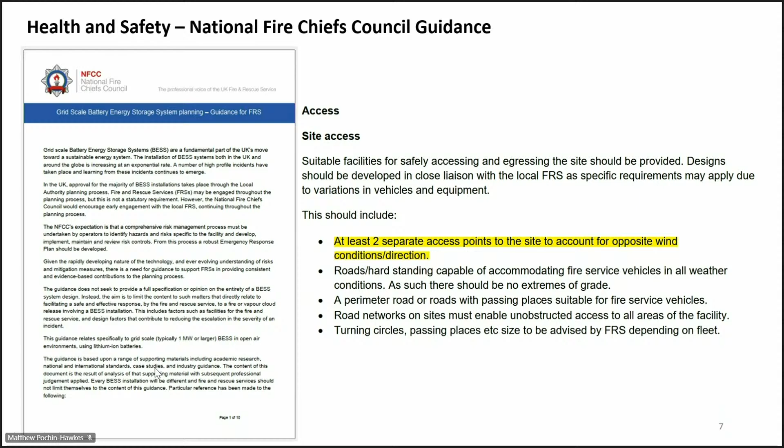Based on the applicant's plume study, which they've submitted since the committee, this branching point is considered to be a sufficient distance to ensure that the Fire and Rescue Service could have tactical firefighting options to approach the site from either direction, depending on the wind conditions.

These BES units have a number of safety measures to minimise the risk of that happening, but the risk of fire cannot be eliminated, and I'll come on to some of those measures. This has been modelled and produced by a principal scientific advisor for West Midlands Fire Service, stated to have hazardous materials special experience for 28 years, advising on chemical classification, monitoring and modelling dispersal.

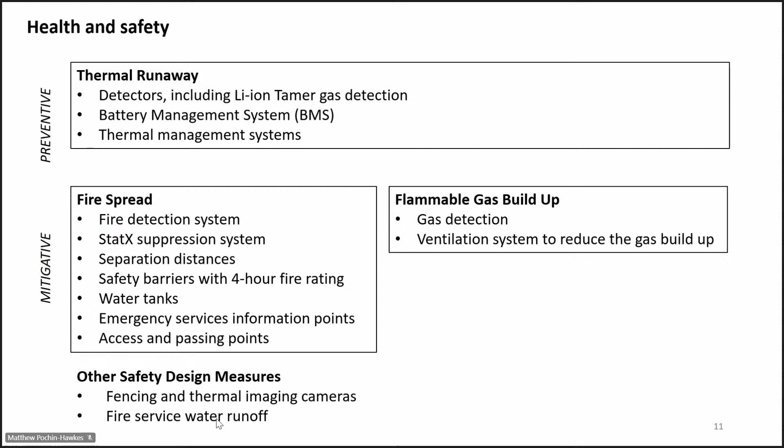That came into operation very early, and it used a different type of battery chemistry. Here is proposed LFP, lithium iron phosphate battery, versus a kind of nickel manganese cobalt, which has a lower thermal runaway temperature. These are just to kind of visualize that.

It's in America, so it's NFPA 855, whereas we've got NFCC guidance here, and that was a significant fire within a building of the first phase of the development.

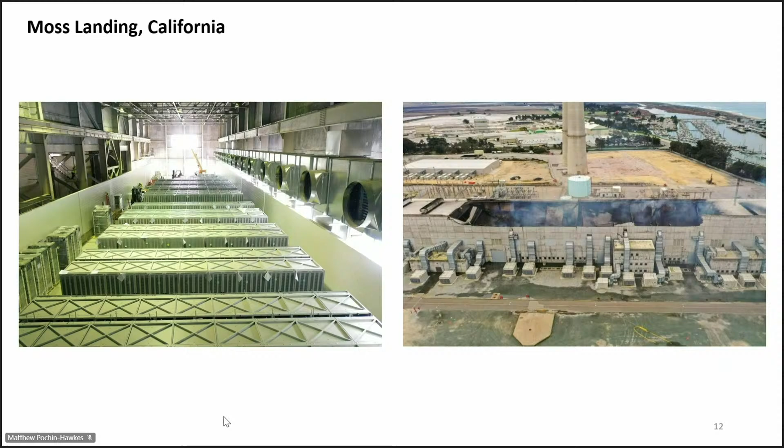And here, there was a fire during the construction of this development, and according to the reports from the Fire and Rescue Service, it was dealt with promptly and returned back to the construction team within 24 hours. And that kind of demonstrates a good emergency response in that situation.

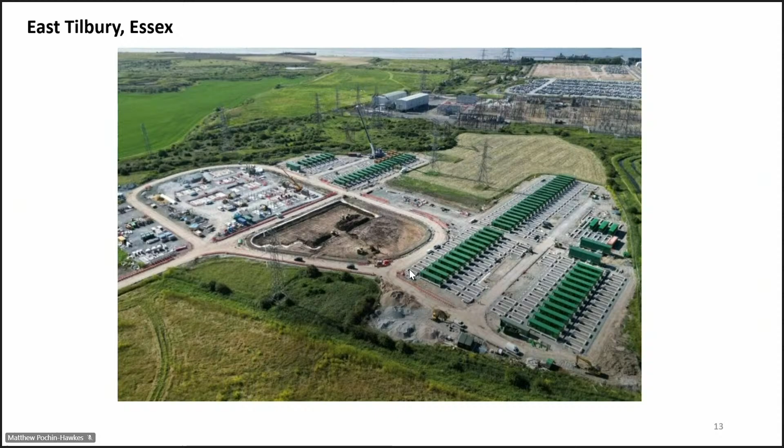So, in terms of the recommendation, we've looked carefully at the matters raised at the January committee and consider that the applicant has demonstrated the access arrangements to be suitable. The Fire and Rescue Service doesn't object. Whilst there have been extensive objections, it's also important not to lose sight of the benefits of this development, as well as captured in the January committee report. There are significant benefits of the proposal, which are considered to significantly outweigh the limited harm of the development.

So the recommendation here is to grant planning permission subject to conditions, and those conditions are outlined in the update sheet. I'm happy to take any questions on those conditions, but I'm just going to touch on the ones that have been adjusted.

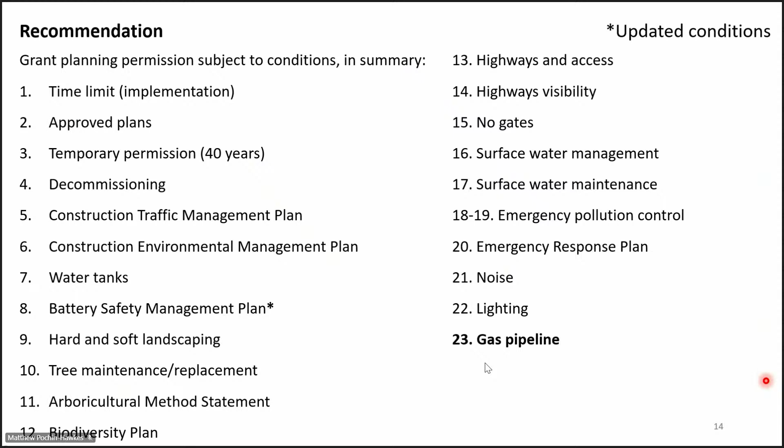That's condition number 8, the battery safety management plan. That's been updated to refer to the specific batteries, require the detailed battery safety management plan prior to commencement, not installation, so that just brings it forward a bit, and also be explicit about the CCTV provision being provided. Then the other update is the gas pipeline condition, and that's the condition wording that's been agreed with SGN prior to energisation of the development. There is also that informative that I mentioned on the police security measures for the site.

So thank you. That concludes my presentation, Chair.

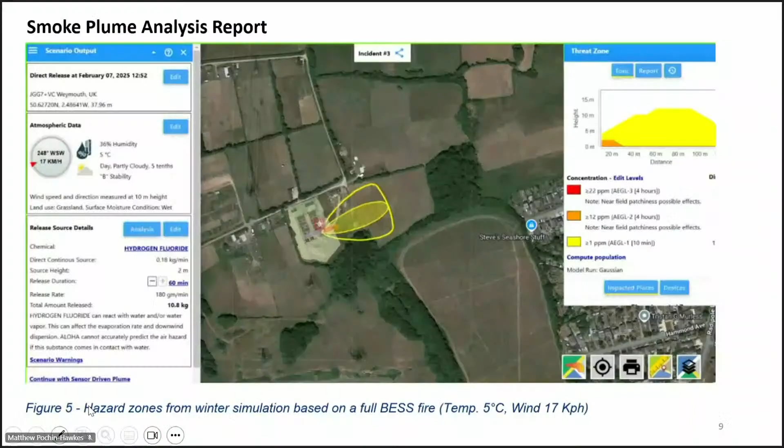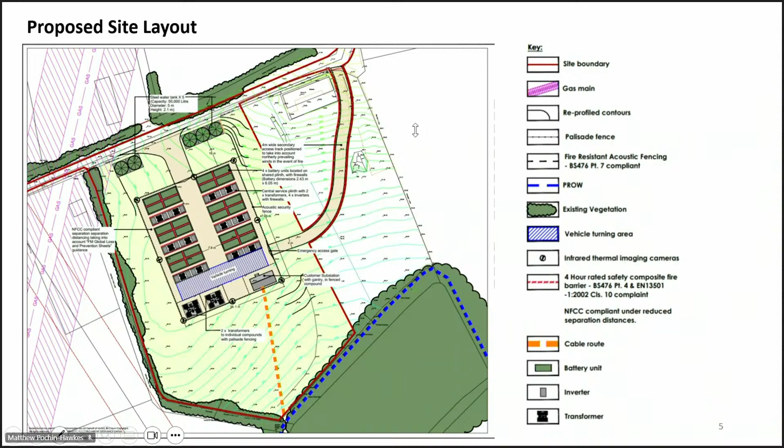Thank you. Councillor David Taylor, Charminster, St Mary's. Thank you, Chair. Yes, sorry, one question I did forget, which I want to come back in on, if that's okay. Charminster, St Mary, by the way, on that one there.

Your statement regarding the production of electricity for the benefit of the community. Now, I would like some clarification on this because I'm trying to find the paragraph in the wording there. I hope you can understand. It says where you're going to give a certain amount of energy to the community. You stated you were giving to 250 houses, was it? Something like that? Homes? Because the statement doesn't say that, it says it goes to the grid. And that's what I want to clarify, because it's got a differentiating statement there saying it's a benefit to the community, but it's actually going to the grid. So what is it actually giving to the community instead of just being a substation? Thank you.

So the energy that would go back to the grid isn't ring-fenced for the local community, it can go anywhere. I think the figures in the January report were purely for illustrative purposes, to picture how much energy this could produce in terms of serving local homes. So I've used ONS data for average energy usage in Dorset, which pulls out a figure of around 11,500 homes. But of course this substation sits in the centre of Dorset - we've also got Mannington, that's all we've got in Dorset at this level. So that electricity could go anywhere. In the committee report I'm talking about it in general planning benefit terms, a wider community benefit, and that tallies with the renewable energy net zero benefits as well, so it's an observational fact. Yes. Thank you very much. Thank you.

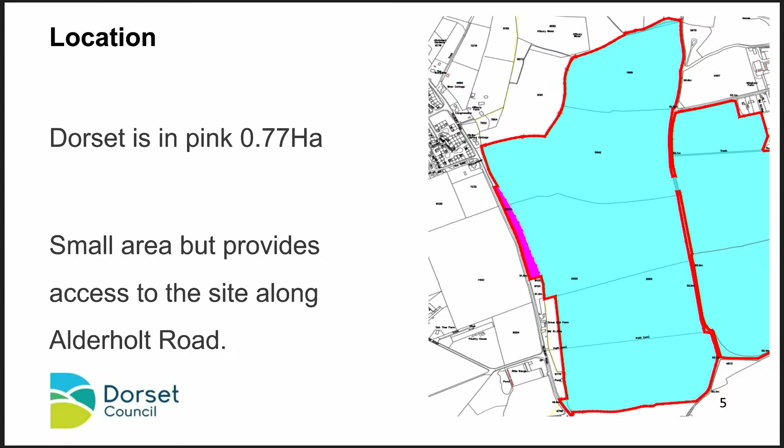So what does CEMEX want to do? Well, they want to extract 3.6 million tonnes of sand. The extraction will take around 13 years, with 5 years of restoration at the end. To facilitate that restoration, they want to bring in around 2.9 million tonnes of inert waste. They want to do this in a series of phases, which is the norm for these kinds of applications - you phase your extraction and phase your restoration, so you're not doing everything at one time. They'll do that in 3 different phases, which I'll show in more detail in a minute. As I said at the outset, there's also the usual supporting infrastructure like offices, haul roads, weighbridge, lagoons, and some in-site conveyor belts, which is the norm for applications like this, and I'll show that briefly in a bit.

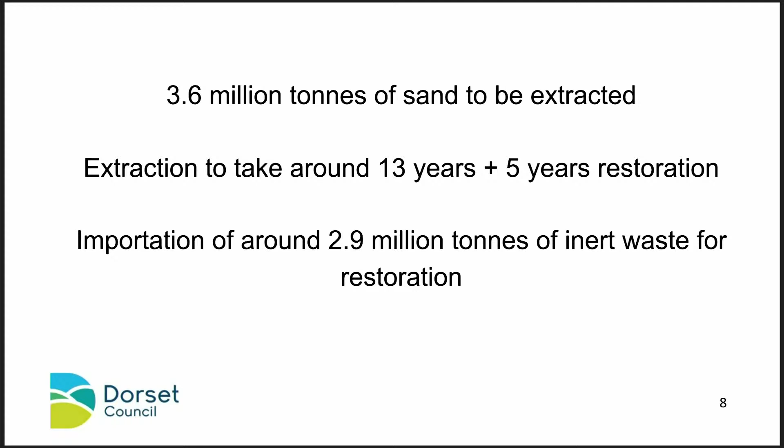So this is what the phasing is going to look like. The first phase, which will run for about 3 years, is extraction only. There will then be a period of extraction and importation, which will run for 10 years. The third phase will be about 5 years long, which will be importation only, bringing in the inert material with which to restore the site. So that gives you a feel for some of the stuff I'm going to talk about in a minute, because a lot of this drives HGV movements and the transport challenges and opportunities that are there.

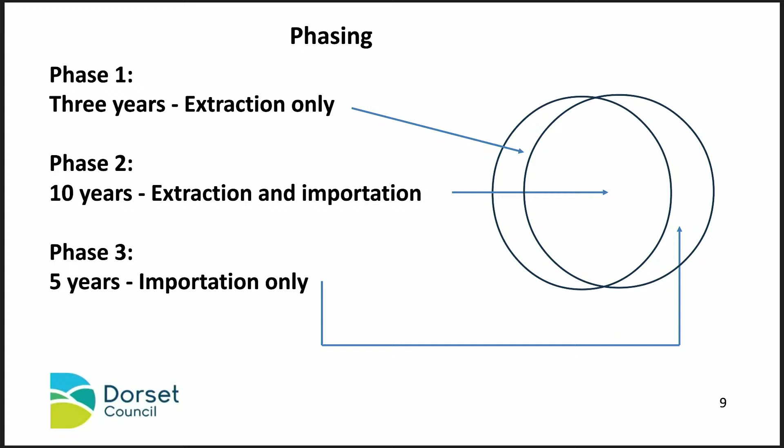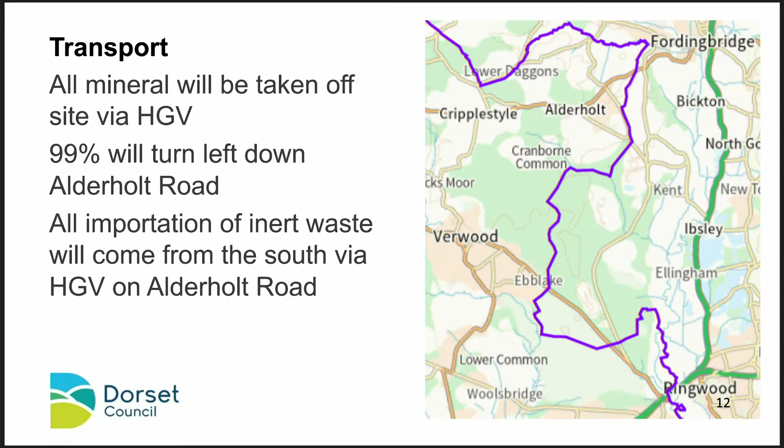Baker's Hanging is a national speed limit, and we've got some transport colleagues here who can talk about that. CEMEX have done a transport assessment in which they say they accept that some parts of the road offer challenges, but they say that HGVs can always pass what they describe as slowly. However, I will say they don't define what slowly means. And there are other parts of the road where HGVs can pass with no challenges at all.

So how are we looking at the minute? What's the current situation? We currently have around 2,500 vehicle movements per weekday along the road. The busiest hour is the morning rush hour between 8 and 9, where we have 220 vehicle movements.

And we currently have 80 HGV movements from Hamer Warren. We have other HGV movements as well, because the road is used by part of the road network, so other HGVs use it, but 80 of those are from Hamer Warren. There's hardly any HGV movement, if any at all, around the weekend from the quarry.

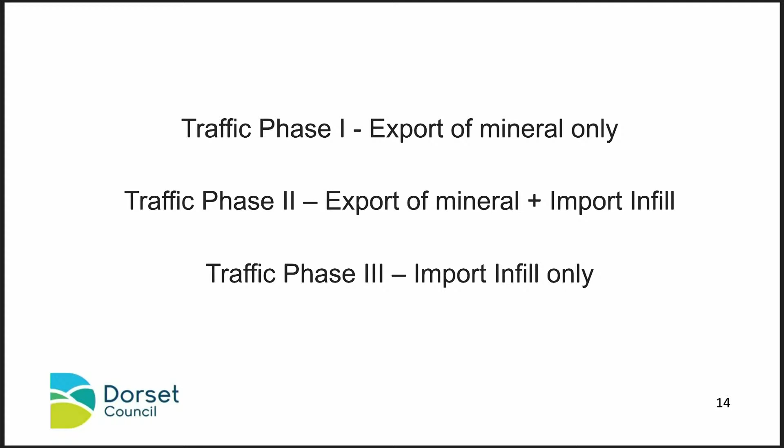So I said earlier about the phases when I showed that Venn diagram. So phase 1, mineral coming off-site only. Phase 2 will be mineral and import going both ways. And then phase 3 will be when we are bringing inert waste in for the restoration.

Let's have a look at some of the numbers associated with that. So during phase 1, it's quite likely that Hamer Warren, or Bleak Hill as it's sometimes called, will still be restoring, and they will be having around 36 HGV movements a day.

So I'll just say that again.

Hamer Warren phase 1: it's quite possible they will still be restoring, so they'll have around 36 movements a day. Midgham Farm, if permitted, will be extraction only, giving 90 movements a day, totaling around 126. As we move on, Bleak Hill stroke Hamer Warren will conclude.

There'll be no more restoration or extraction there, so we'll just be looking at Midgham Farm. We'll move into phase 2 of Midgham Farm, which is both restoration, bringing material in, and extraction, giving us around 132 HGV movements a day.

Then as we go to phase 3, which is simply the restoration and movement of infill into Midgham Farm, that gives us 90 HGV movements a day. So that's an indication of the volume of traffic moving along this road.

Of course, transport is more than just vehicular access. People move around in other ways. The footpath network is important in this part of the world. The vast majority of these are Hampshire footpaths, but they are used by our Dorset residents, so it's very relevant to our conversation here.

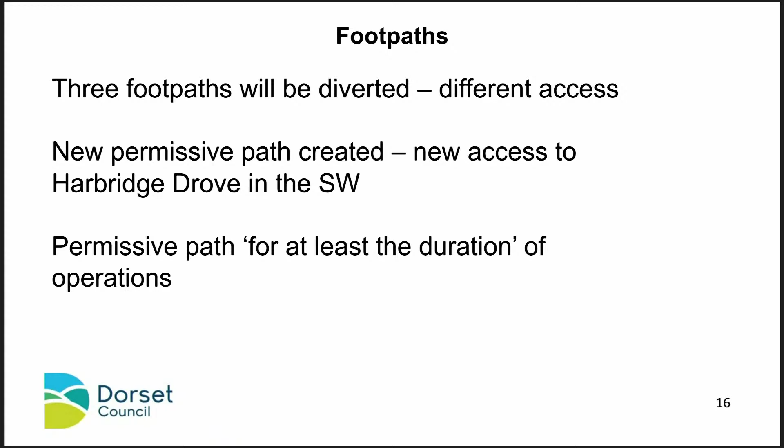The plan is to divert 3 footpaths, which I'll show you in a second, to facilitate the development, and then to create a new permissive path in the southwest. In the application CEMEX put together, they say that permissive path would be in place for at least the duration of the operations. So there may be a conversation about keeping it for the long term, there may not, but that's something we can perhaps look at.

So the plan for the footpaths would essentially be to move the current footpath network out and create a larger circumference around the site.

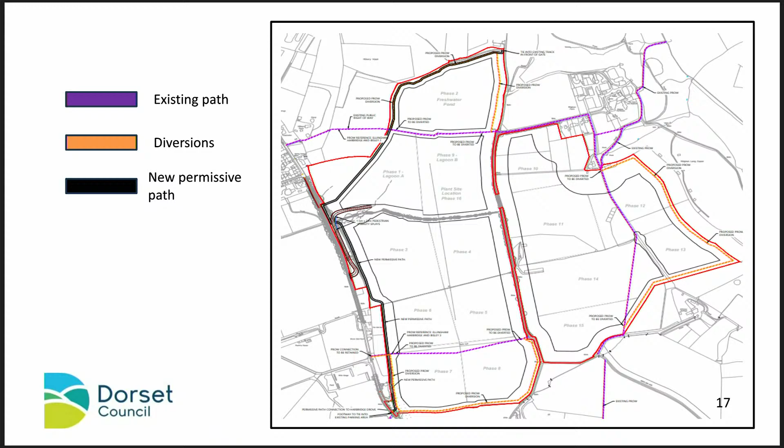Moving on away from transport, there are some environmental health concerns, such as noise and dust. Perhaps one of the most important is that the traffic needs to stay out of Alderholt, which we think we can ensure. And there are other concerns as well, around noise levels and dust.

We're confident we can have conditions with the applicant and Hampshire, as the decision maker, around the right conditions to ensure that happens if they get the right baseline. So it's a conversation to be had.

So we know where we are, we know what CEMEX want to do, and I've looked at some of the potential impacts as they hit our Dorset residents. So what I'd like to do now is move on and look at some of the policies we have in Dorset which could guide any response.

The first is policy AS1, where we have a duty in Dorset to ensure there is an adequate and steady supply of mineral. It's only fair to recognise that other authorities have got to do the same thing, and we have to support them in that, including providing high quality consultation and ongoing engagement with Hampshire County Council and other stakeholders. Our commitment is to help them with that.

Another relevant policy is the presumption in favour of sustainable development. So we have a responsibility to engage positively with the process, to take a positive approach, and to work proactively to find solutions if there are any available.

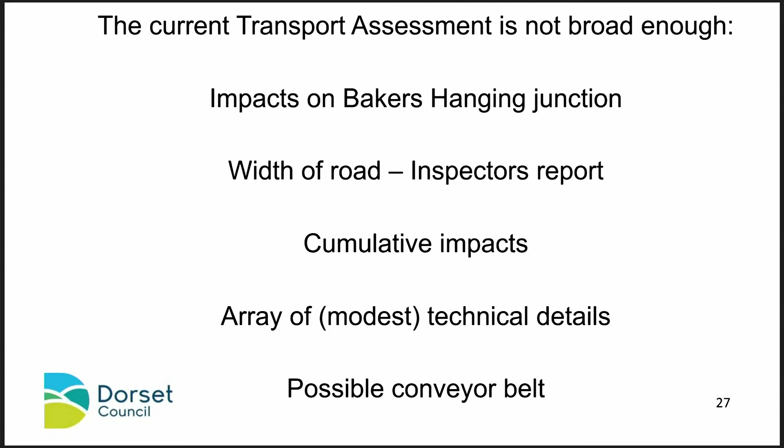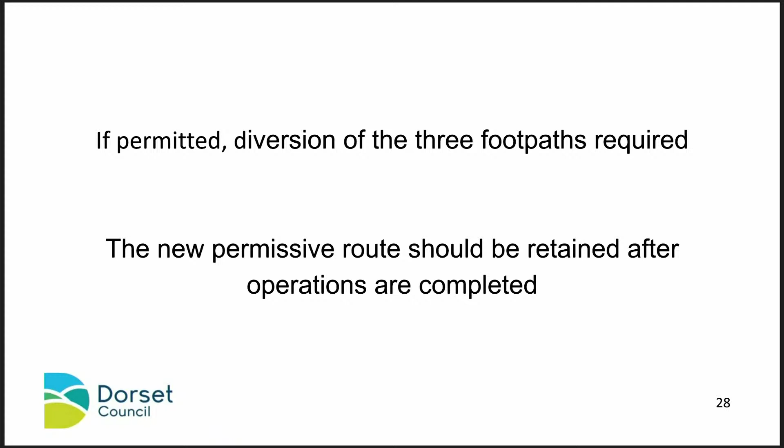If permitted, as I've said, the diversion of the 3 footpaths is required. We think it would be great to spend some more time examining if the permissive route could be retained after any operations are completed, if they were permitted to go ahead.

There are, as I say, environmental health concerns, but we're confident that some good conditions and some good liaison can address these. We know that Hampshire have got feedback from New Forest District Council and from their own colleagues as well, so there's a shared voice around that.

And if the development is permitted, we think we should examine if a Section 106 is needed to mitigate any residual harm which is still there, and that may include a community fund to support local projects, and that would be funded by CEMEX and run for the duration of the Midgham Farm operations. Again, we think that would be something interesting to explore.

So I'd like to bring us back full circle and finish off where I started and say that the recommendation we'd like to bring here this afternoon is to say that we should write to Hampshire County Council objecting to development, setting out our concerns, but sending a signal to them that we want to work with them to see if there is a sustainable solution and what that looks like.